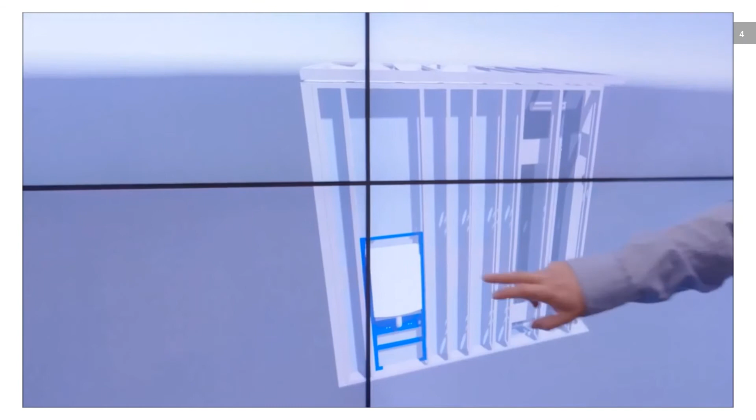There's a huge track record based around computer technology, computer scientists, programmers, which manage that data. Together we are able to produce a new process that will bring together a more collaborative environment of concurrent, simultaneous engineering based along lean principles that would create the next generation of project delivery and result in faster, better and more improved results for our customers, clients.

So in summary, Fulcro is a unique, agile, niche, specialist, fantastic group of architects, engineers, designers, technologists, computer programmers that enable faster delivery with improved quality, always looking at increasing value for all stakeholders.

One of the challenges that I consistently speak about is the plan of works, the traditional historic nature of breaking up the design process into stages, where you could present risk avoidance, risk reduction, risk transfer and risk impact as benefits.

I worry about, and have evidence and experience of, individual design teams, work packages, construction teams actually using these work stages to mitigate their own risks, reduce their own risk transfer impact, and the collective impact of that is a reduction in value for the total outcome of the design and production construction process.

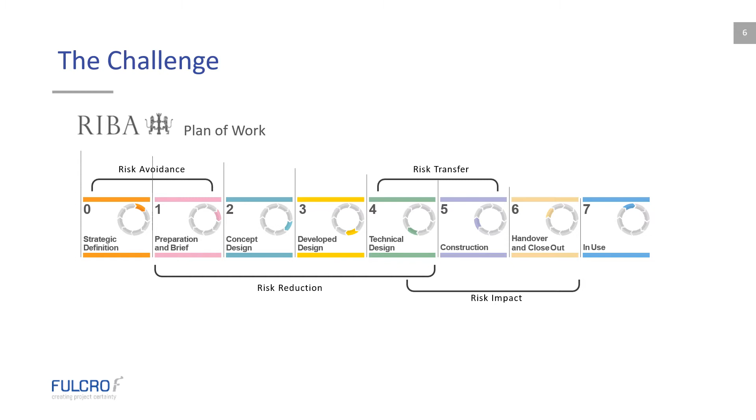That then does lead to challenges with respect to disconnects, as evidenced by this fantastic graphic of scissors that I managed to crib off the internet. It basically communicates there are disconnects between the consultant and the contractor and fabricator, and sometimes the client, not represented on this slide, but ultimately the project will suffer.

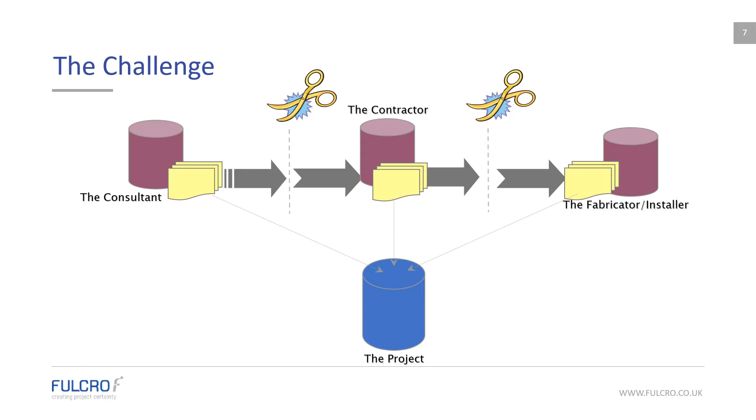And this is evidenced by the Chartered Institute of Building: 60% of projects are late and over budget.

I believe that demonstrates a real need, as all these reports did, the Egan report, Latham, we've had all of the conversations about the betterment of building information modeling and how we should improve, but it's really about everybody understanding the following:

That there is another way, and it's right under our noses. And that other way is we have to find a way to bring the manufacture and assembly processes and technologies, which ultimately drive the procurement and logistics of a project, into the design phase.

Then we have to educate our clients that they need to adjust their spend profile to start producing designs that are construction ready as part of the normal process and business as usual moving forward in our industry.

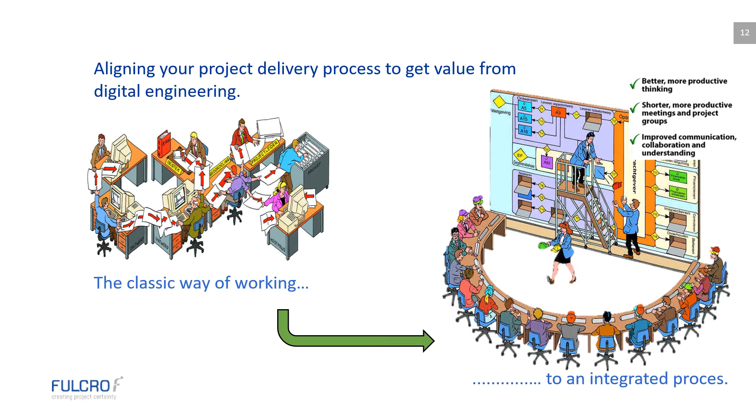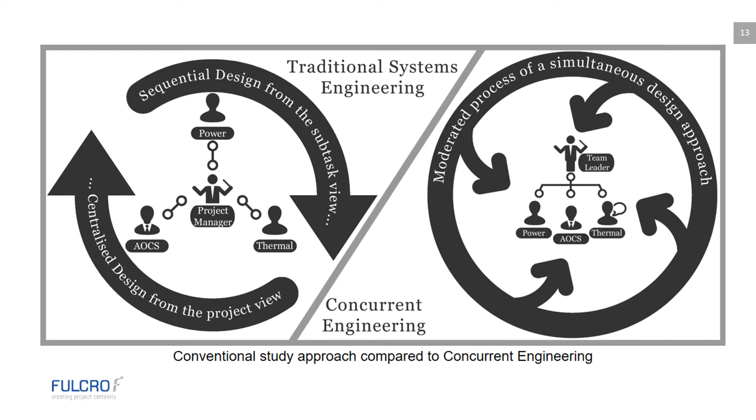We really need to move to a concurrent, simultaneous approach, as illustrated by the right-hand diagram, and move away from a traditional systems engineering, sequential, centralized design from a project view to more of a concurrent team leadership, with people recognizing the roles and contribution they make to the whole and not just looking after themselves.

The other key factor of this new way of working is we have to move away from the master and servant, or the upstairs downstairs chip on the shoulder that I have with respect to CAD users and technicians. We have to make sure that people understand that a designer is a designer who can use a CAD system but also contribute to the design.

This is a classic example: on the top left is a normal design intent engineering line diagram for a drainage system that an engineer would produce. That would then go to a CAD technician to draw up, then onto a set of drawings, then it goes to site, then somebody starts getting the components together and realizes there are inverts because of components, and drainage has to go in at a fall. You have swept bends, you have to rotate bends, and the other images illustrate how that manifests itself into an installation.

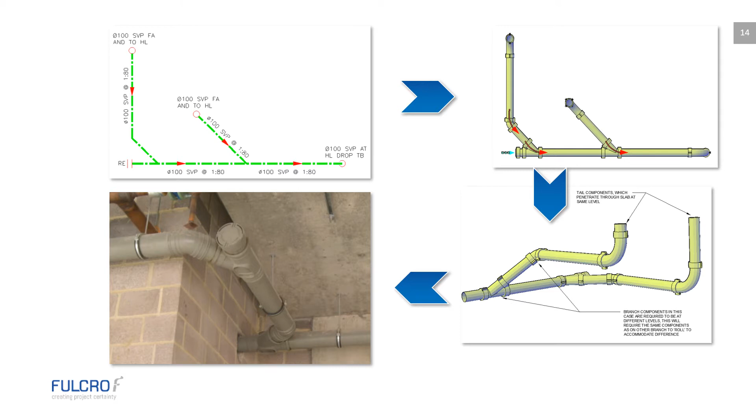If you can do that and create that environment, then you have a wonderful next generation arrangement of working. We have people in our business, generally the younger, but everybody's aligned to it, with more acceptance of an expectation of doing things differently.

And if you get that people and process correct, then you can start really pushing the technology and asking the right questions of it.

I've just got a short video to illustrate a vision of what we expect and would like from our technology.

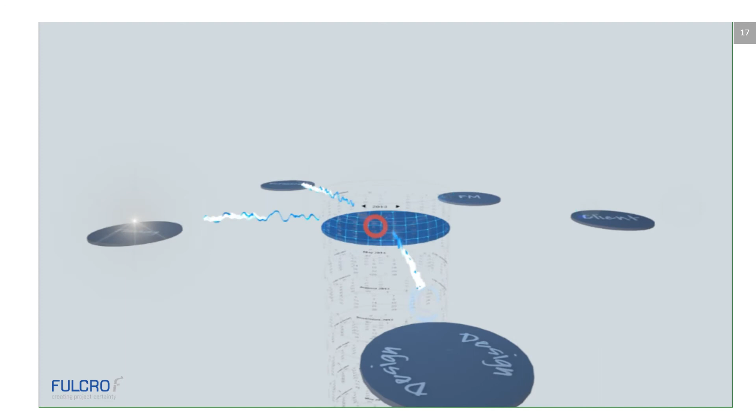There are many components such as planning, FM, client, design teams that contribute to a digital prototype, a hub, a database. We want to start using the Internet of Things, AI, but we must understand that everything has to start with a component or an object.

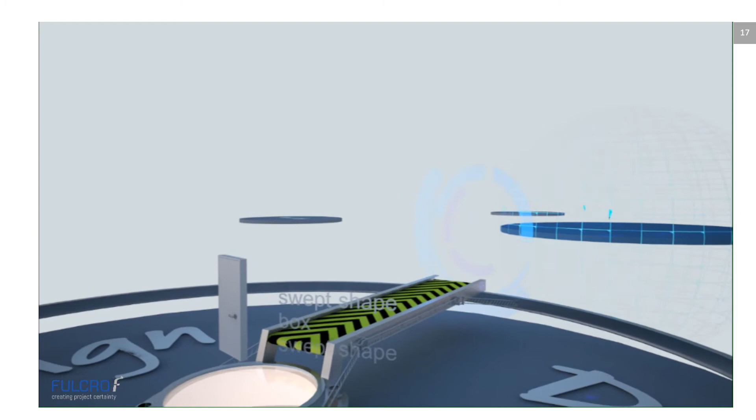So here you have an illustration of the shapes, the group geometry that gets assembled for a door. You then have an I-beam or a piece of pipework, but all this geometry has to be checked and validated and be present correctly into the system, which is the digital prototype, the collaborative working space.

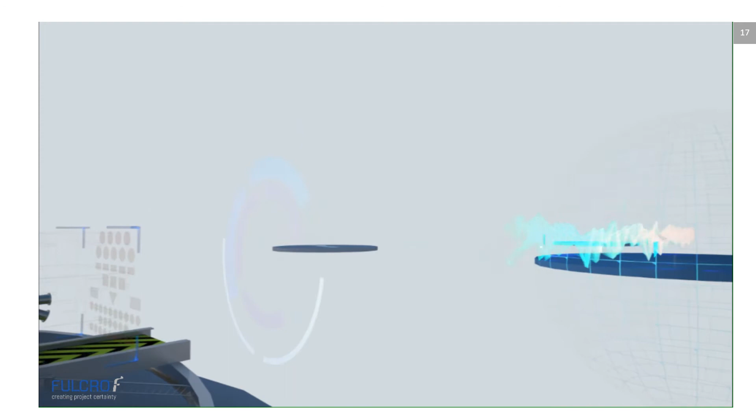And if you can do that, when these objects and components go in, because they've got a taxonomy and a data structure, we can ask our engineers and designers of the technology systems we use to start creating intuitive, automated processes within the environment we work in, to help improve and speed up the design of a building.

An example of how that works today is this, which is a set of work packages associated with the fit out of a set of apartments. There were 28 or 26 apartments, I can't quite remember, on this particular building.

We said that we could create a digital prototype using the design and work with the designers to give you an as-installed, as-assembled, as-in-operation state of the building based on this apartment, to look at the fit out and contractual construction durations while validating the design and the detail.

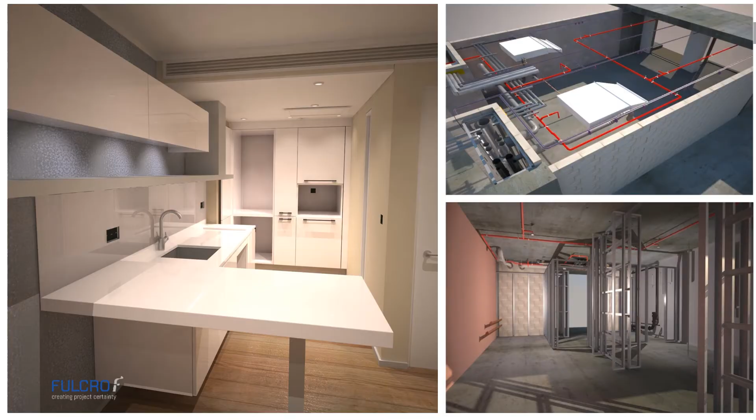This is a screenshot of a digital prototype. All of these images come from the same data, and we have a video simulation, linked to a 4D construction program, and then each of these components is also linked to the particular work packages, so we understand that the kitchen fitter needs to come in and do a second fix before they assemble.

We also adjusted walls and things to reduce the amount of variance from off-the-shelf components. We've got all of the background, the skeleton to do with the internal partitions, the sprinklers, and all the secondary fix items in there.

This resulted in us testing and validating and producing a deliverable activity program, integrated design and construction program, assembly program, which reduced 3 weeks off the apartment build. That 3 weeks can be replicated across the 26, 28 apartments. I won't do the maths, but that is a significant saving in cost, based on time equating to value.

I'm now going to evidence a few more examples of how this process benefits. This is a 10-year-old project, I believe. It's a teenage cancer treatment center.

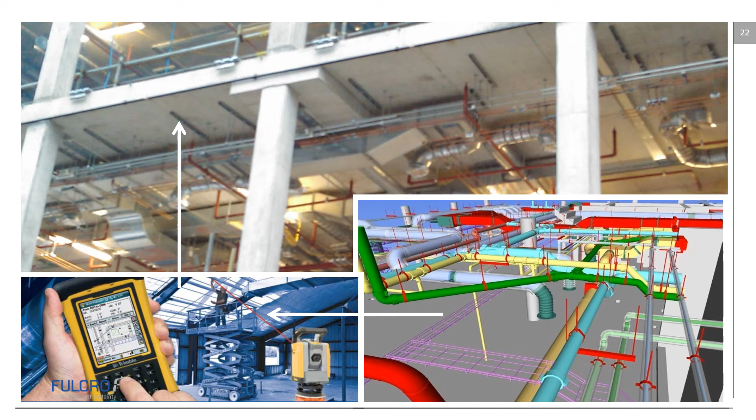It's got a double height basement, and in this particular project we detailed all of the internal services. We did all of the wall elevations, all of the detailing of the builder's work, the bedhead assemblies, the in-wall equipment, and we produced all of the set out documentation.

The digital prototype was deemed to be so accurate, and the confidence within it such that we take professional indemnity for the construction documentation we issue, that actually all of the setting out of the ceilings and above ceiling services were done through a Trimble total station, so that trades were coming onto site with their components, knowing exactly where the location to assemble and build to.

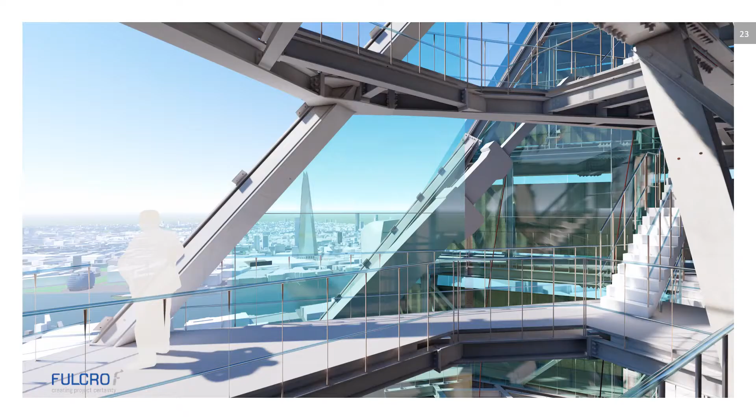This is an example of a federated model based on the Lime Street Scalpel development in central London. In this scope of work, we were validating and verifying the design detail. You can see the detailing of the steelwork structure brought in by the manufacturer. We added detailing for the glazing, and looked at the BMU and services for vent, which were omitted or missing from the design in early stages and were picked up. Here is an image of that vent, with the BMU arm off on the left-hand side of the picture.

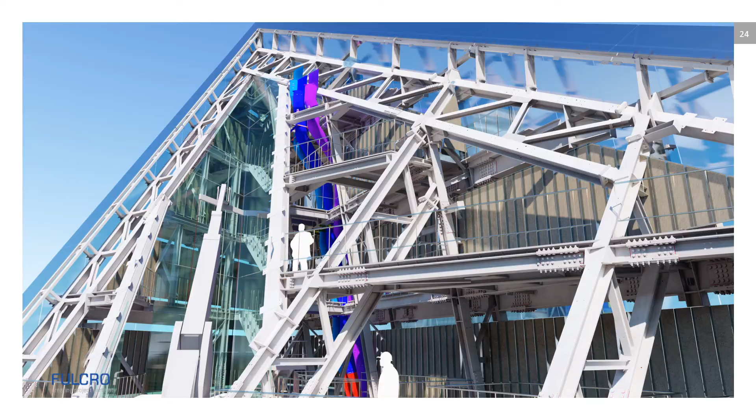Another project, one of my favorites, is a 32-story, 363-bed mixed-use rental PRS building. This is what I believe to be the world's largest volumetric modular building, meaning it had no structural core at all. The whole building was assembled by stacking these modules on top of each other, then tensioned together with a mass damper on the roof for structural integrity, because the building ended up being a lot lighter than a normal building.

The building is in operation, and has been for many years now. It's called 461 Dean Street, and the client is very happy with it. We visited it twice last year. It's always 95% occupied, and it's operating and functioning as a successful building.

Each of the modules were assembled with sub-assemblies of bathrooms, and it was all assembled in a factory with the facade systems on it. It had all of the white goods in it. It was about 97-98% completed before it went to site. The remaining percentages were mateline pieces and some timber flooring in some apartments for the kitchen areas, because the specification wouldn't allow it to be installed in the factory during some phases due to temperature variance in New York. We couldn't assure the temperature was right for the timber flooring, so that was installed in some of the apartments on site.

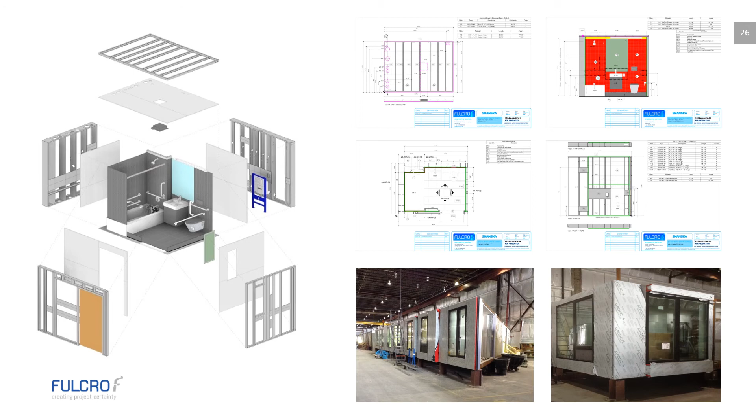Another example is Dudley College, an example of a group of people, including a client, recognizing that if we were to work collaboratively with a shared project bank account, and the project was collectively insured by an integrated project insurance, we could deliver betterment for the client and share in the rewards.

The project was put together by these key groups of individuals, and we won a Construction Excellence Award, a National Award. We won a regional award, and the project was delivered with a 6.5% saving against the planned investment target we were all aiming for.

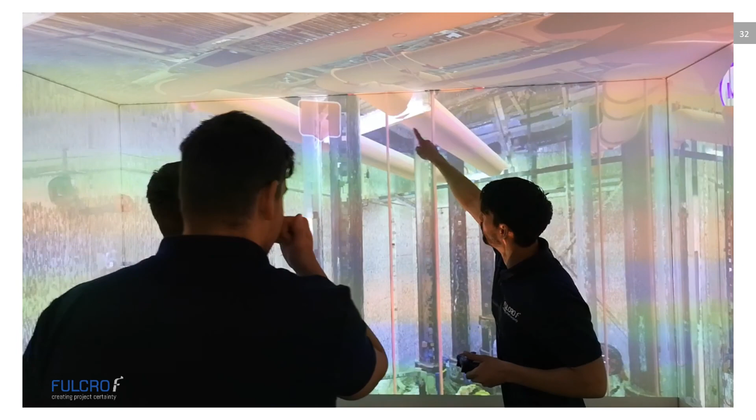Here is a video of a group of our technicians looking at scan data. They are loading up their own model geometry, reviewing and validating and placing comments on the model in preparation for a design review with potential trade contractors to take on the role of fabrication and installation.

So thank you very much for listening to me. There's an awful lot more I could talk about, but the upshot is that I really believe we can deliver betterment in our industry by adopting the technologies available to us, but ensuring those technologies are underpinned by people with the right skill set and the right collaborative attitude to get maximum value from today's technology for tomorrow's buildings. I'll be happy to take any of your questions. Thank you very much.